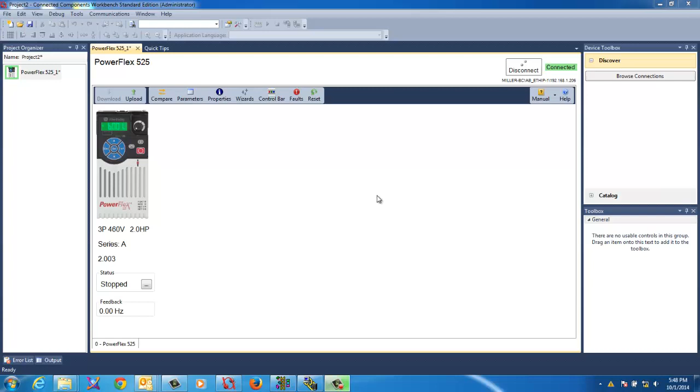Welcome to setting up the 525 to be controlled by a Micrologix processor. We're going to use a 1100 today. It's the same thing as a 1400 and so forth. Setting up your drive, I made a video on setting these up before, but I'm just going to do a quick run back here to show you how to set these up correctly.

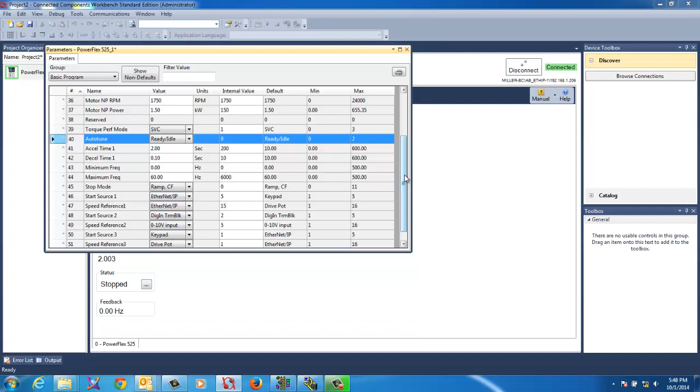So you'll enter in all your information in your motor, your acceleration, your decel, your min and max frequency, your stop mode, your start source, which we're going to do over Ethernet, your speed reference over Ethernet, and then you can set up the rest however you want to. Go to your properties, go to communications, and have your drive set up. Ours is at 206, so we'll be using 192.168.1.206.

So we can go ahead and get started. We're going to go ahead and make a brand new project. Open up your RSLogix 500. Select new. We're going to select the processor that I'm using. It's a 1763 and it is a Series B.

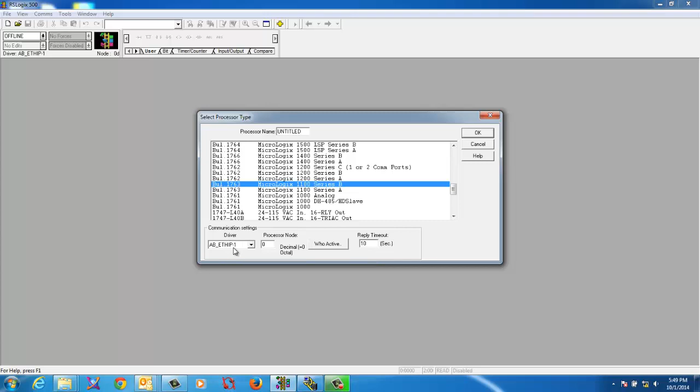Our driver is going to be over Ethernet. If you haven't set these up before, I can do a different video, but I already had this one set up with an IP address ready to go. So we're going to go ahead and use the Ethernet IP driver, and then we can go out and find it so I can download to it.

Alright, go to configuration. We're going to have to set up the processor for the right IP address. And since I already have it out on the network, we'll just run and look. We're using 200, so we'll go ahead and use that one. Sorry, wrong one. Go to channel 1. And we're not going to use BOOTP. We're going to go ahead and set it with its address. 192.168.1.200.

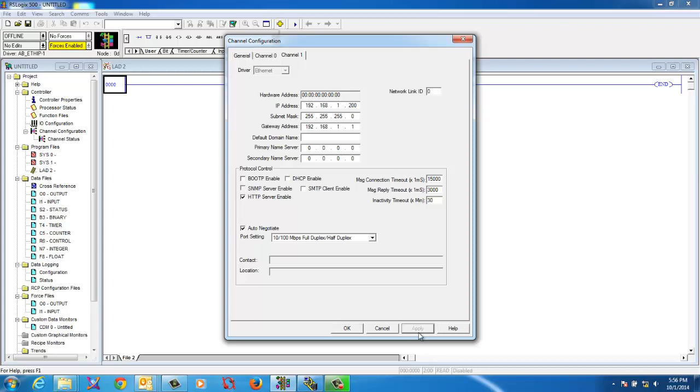Oops. Alright, I'm going to hit apply. Hit OK. Now you're going to want to set up your message files and your transfer files that we're going to need. So go ahead and we'll set up a message file. We'll have a few messages, so we'll just go ahead and give us 10 messages.

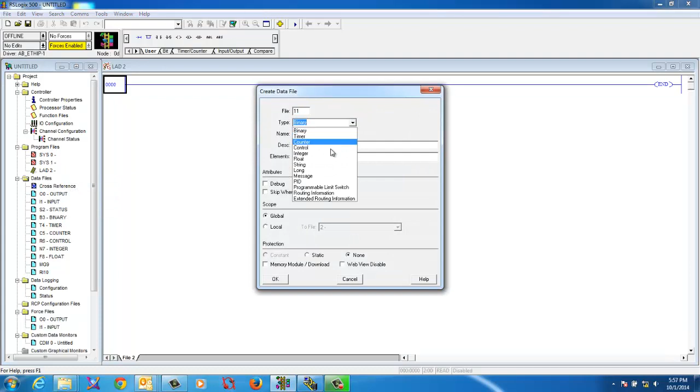We're also going to need the routing information file, so we're going to use a new one. Now we're not going to use the extended, we're just going to use the normal routing information. And we'll do the same thing there to match it up. Do a new integer file. We'll do 100. We don't need that many, but I'd rather have more than we need. I believe that's all we're going to need at the moment.

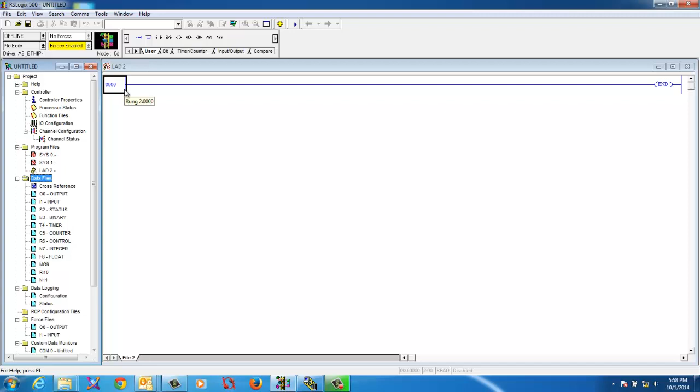So the first thing we're going to need is a timer to trigger the messages, and we're going to do a timer and message file, and then we'll add another file for controlling this drive. So we'll add a new rung in the right place.

A timer. That's one thing that we did forget to go in and set up. It only set you up with one. We want to go to properties. We're going to change that. And I add 40 just so that we have enough later if we ever need it. We use the first timer. And we're going to make this trigger quickly. You don't need to do it that fast, but it's just what we're going to do for this one.

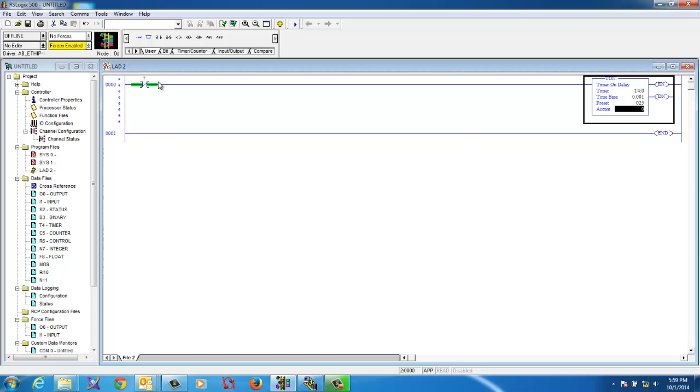Go back to our timer. That way when the timer is done, it can reset itself. There. Helps if I select the right thing. That should be good. Check it, everything's fine. Do our first message.

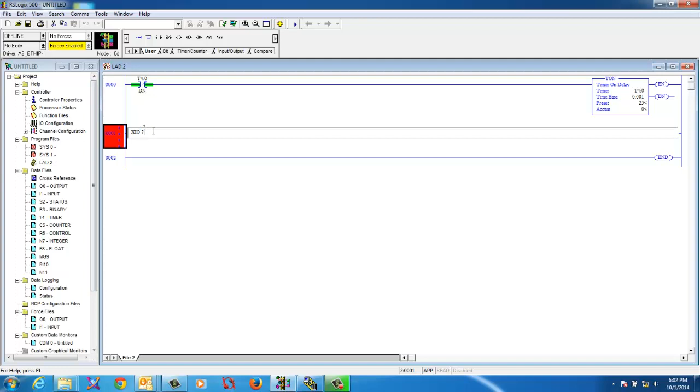Alright, the first thing we're going to have to do is open up a timeout value. The drive is defaulted to 0, and before we can send any control data, we need to have a non-zero value there. And so we'll go ahead and put in a new message. We'll use the first message out of our message file.

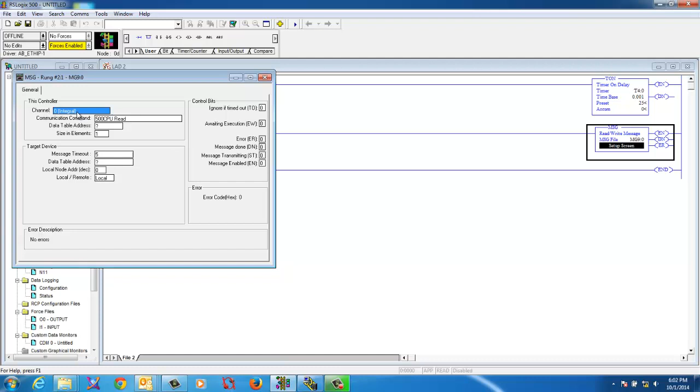And then we're going to go ahead and use the same done timer bit from our timer so that we trigger the message. And we're going to change the first thing in the message from channel 0 to channel 1. And this is going to change to a 500 write. And we're going to use the first integer value, which is going to be 11.0. So it'll be the first one. And we're going to put a 5 here because that's in seconds, so that's got a 5-second timeout value.

So we're going to write N11, and we're going to want to put it in to the drive table N42, or excuse me, 42.3. Now we need the routing information. So we're going to go to multi-hop. We're going to give the drive, if you remember when we set it up, it was 192.168.1.206.

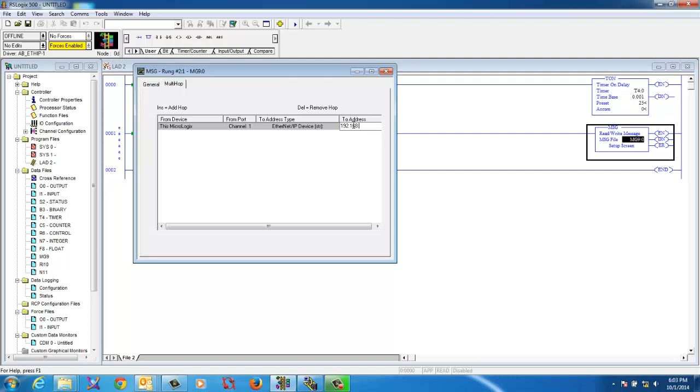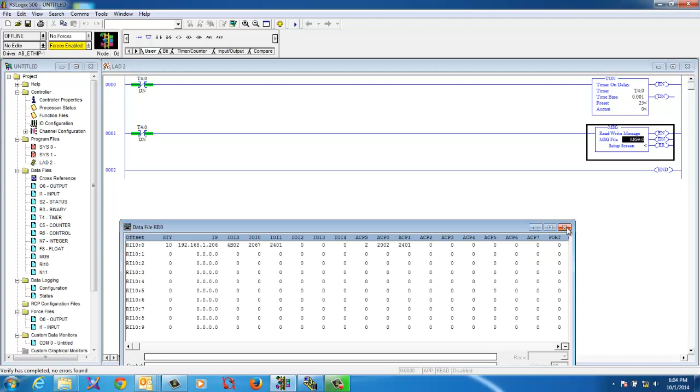Now we can set up the routing table. We'll use the first element, which will be RI10:0. Now this message is set up and it's ready to go. Once you close this and we compile it with no error, when you open up your routing information table, it populates all the routing information that it needs to connect to the drive. So that was the first thing we did.

The second thing, we need to add another message because we're going to want to tell this drive what to do. So basically we're going to do the same thing. I just copied the one from above. We'll change the message number to a 1 because that would be the next message in line. I'll open up and show you. Instead of dragging it, we just changed it. Open up the screen. Everything should be the same except for the file that we want to write.

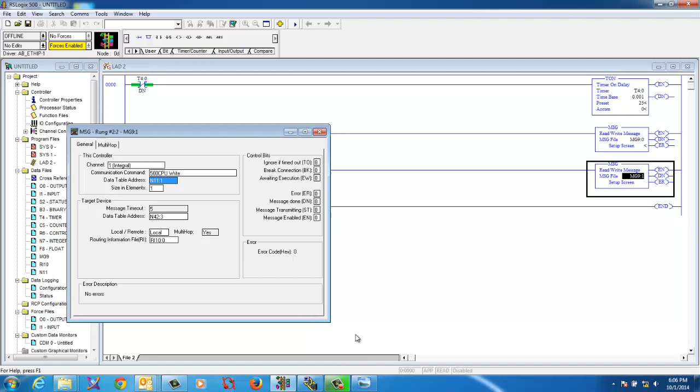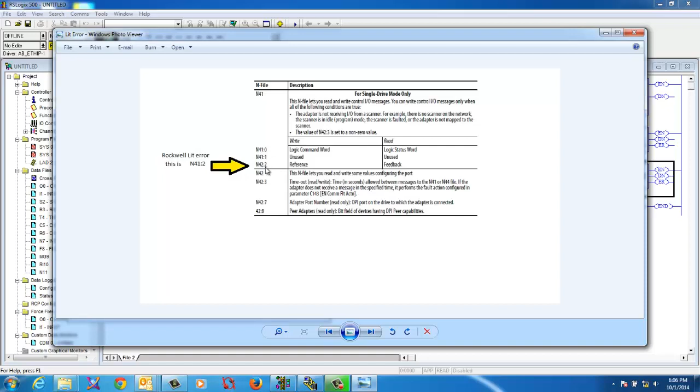So the next one that we're going to want to write, this is going to be our control values that we're going to write to the drive. It's going to be N11.1. And we're going to want to write those to... Now in the PDF that comes with the drive, or you download from Rockwell, it is going to show you that we're going to want to write the logic command word, and it's N41.0. Now later when we go to write the reference, Rockwell has an error, and this should have been 41.2. We'll get to that here in just a moment. So we're going to want to write to 41.0,

and we're going to want to change our routing information because we're going to want to use a new routing information file. Multi-hop still the same. I'm going to close this. I'm going to go ahead and verify it, compile it, and make sure our routing information is set up. Same thing. So anything that we write now into N11.1 is going to transfer to N41.0, and that is the logic command word.

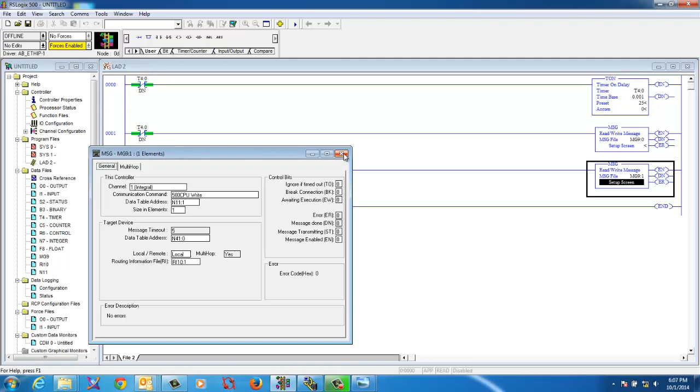Alright, we're gonna put in one more message. We'll probably put in 2 more, but for right now we're going to do 1 more. We're going to do another write, and what we're going to write is the speed reference. So we'll do the same thing. We'll just copy the rung above it. We'll paste it below it, and we're going to change the message to the next number, which is message 9-2. And we're going to go in. It's a write, and we're going to write this one from 11-2. We're going to change the, excuse me, not control word, the routing information, the next one in line.

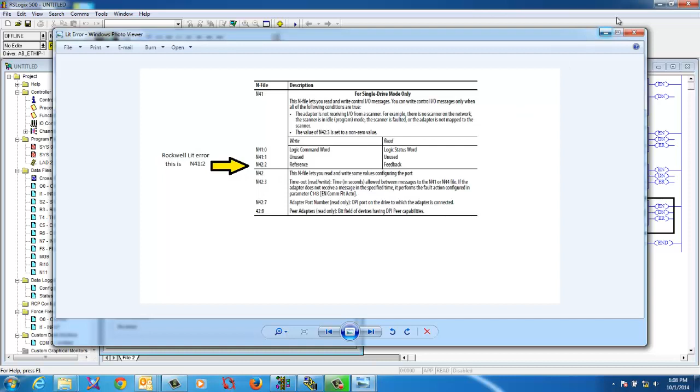And we're going to write this to, if you remember, we'll go back and look at our, we're going to want to write the reference. So we're going to want to write, like the PDF says 42.2, that is incorrect, it needs to be 41.2. So I've set 41.2. Make sure multi-hop, everything's the same there. We update the message, we're still doing a write, and we're using the same port. Make sure everything's fine. Compile. Go back, check the routing information, and it made it.

Now we're gonna do one read. We're gonna read the reference value so you'll be able to see the speed of the drive accelerate. So we're going to copy this, we're going to paste it. The only difference in this is going to be the fact that we're going to go in, we're going to change, of course, the message number, the routing information number, and we're going to change it to a read. And we're going to read it, and we're going to put the information into N11.3. That's all we're going to need for that.

Verify, make sure everything is good. No errors came up. And now we're going to add a new program file. I'm going to call it control.

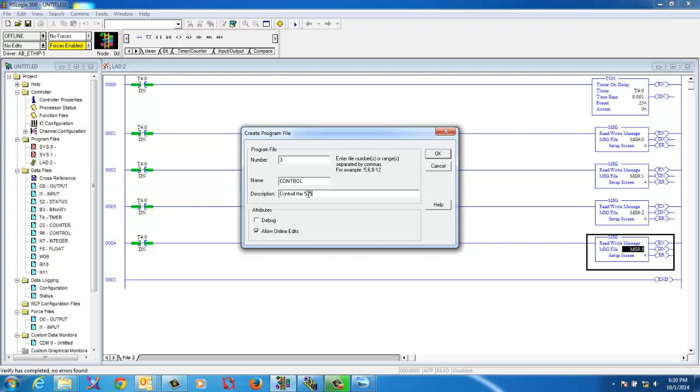We're going to control the 525. We want to put a JSR in, so we want to jump to that subroutine. And it is ladder 3. It's okay, so it's U3. Make sure that's okay. Everything's good. And then it starts over. Bing.

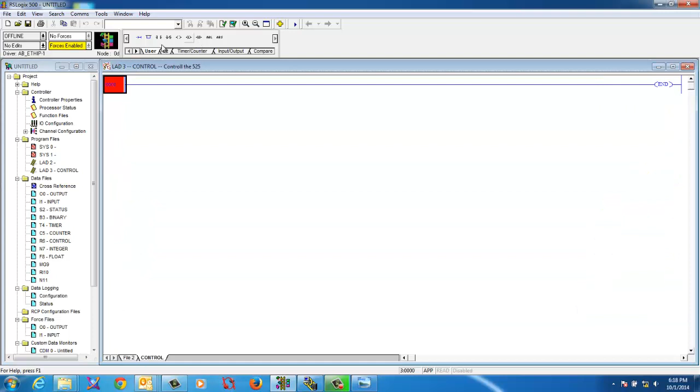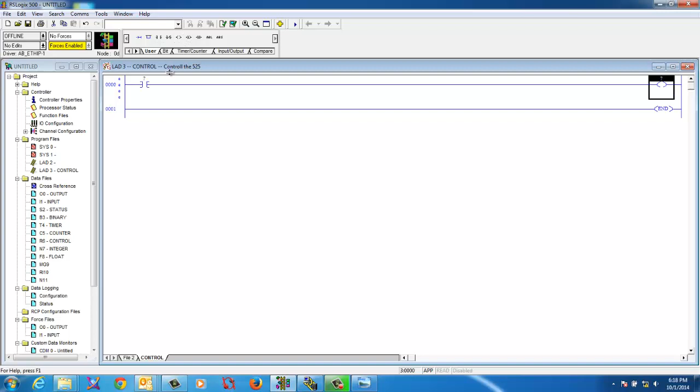Alright, we're going to go ahead and set up your control rungs. So we're going to want a stop and a start right out the door, and we're just going to do these simple. So add a rung. And I went through and I already preset up the binary. So all these, if you look down here in the description as you go through them, I already wrote those down based on the way we're going to write them out. And then you can add them on the other one. I'll show you how to write a description because we'll do the first one.

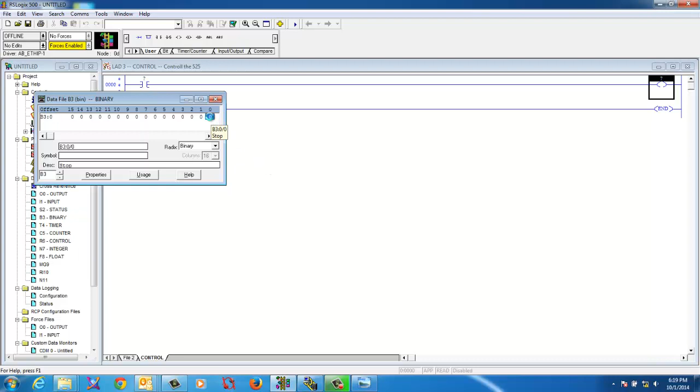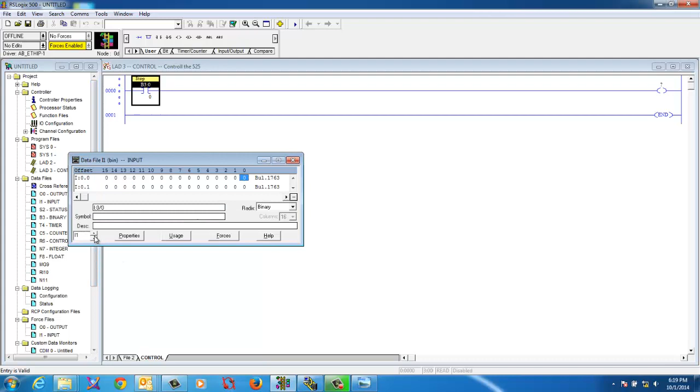So we're going to use the first one here, which is the stop. And then we're going to switch over to your integer file because we're going to write it to N11. Remember, what I mean by that is we're writing it to where we set it up in the message. So if I remember correctly, we're going to the control word, and we used N11.1. And we're just going to go verify.

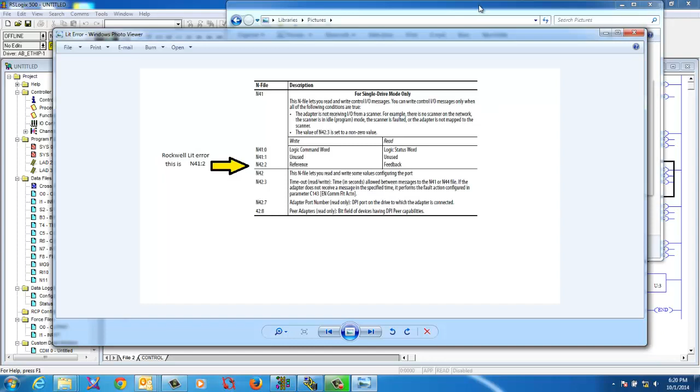And to do that, you just go back to your message routine, go to the second message, because that's when we set up for control, and it was. Because we're writing to N41, and if you remember in the PDF, it shows you that, right here, N41:0 is where we want to write it for the logic command word, and that is referenced off of the logic command word.

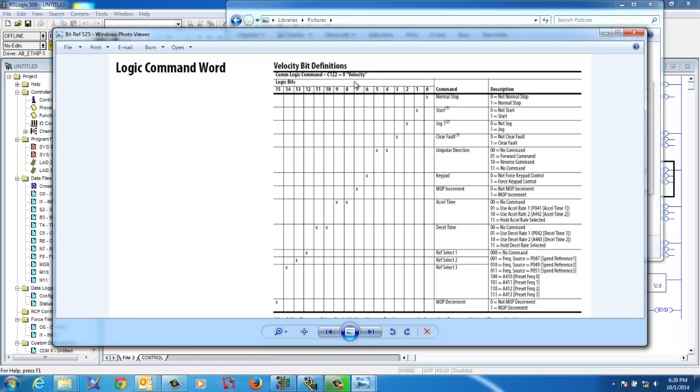And there's two of these, one for velocity and one for positioning. 90% of us will probably only use velocity, so we'll keep C122 at 0. Otherwise, you can go into your drive and change it to a 1, and that's for positioning. I'm going to minimize these so we can reference them here after a bit. But we're going to go back and we're going to write all our commands into N11.1.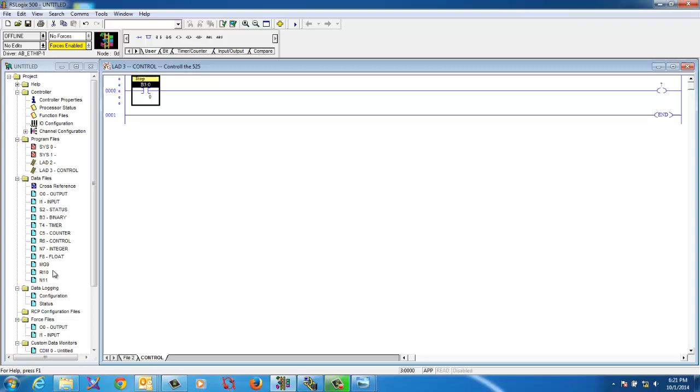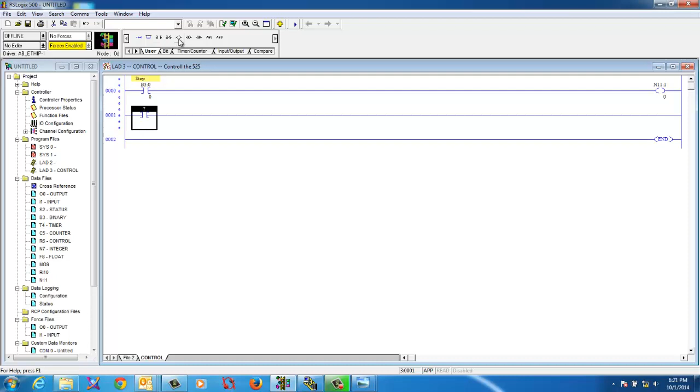So we'll open up N11, and then we're going to highlight N11:1, and then we're going to go over here and switch it to binary. So that gives you all your bits in that array. So the first one, 0, is stop. We'll add another rung, and we're going to want to put a start. So go back to N11. So the start's going to be here, and switch back over to binary, and the first one in there is the stop.

So in your integers, the one that you're going to write, if you want to label these, the description can be stop. So I just put a description in there. I usually write them as symbols. And as you go through each individual one, they'll change. But drag this up for our start drive.

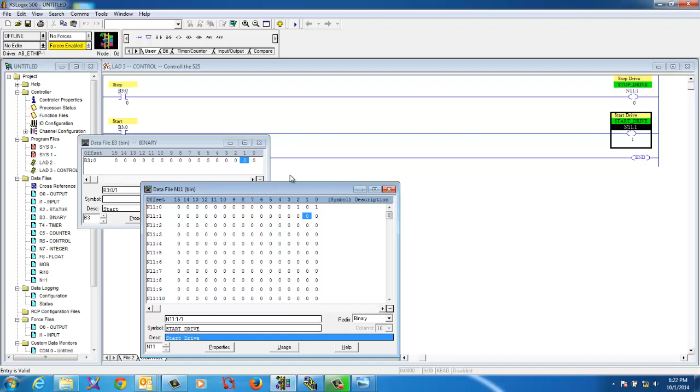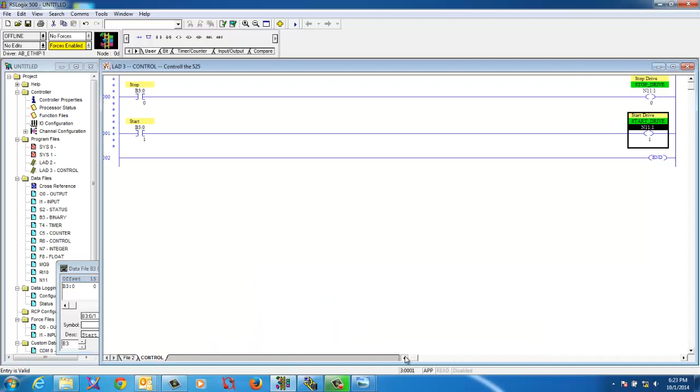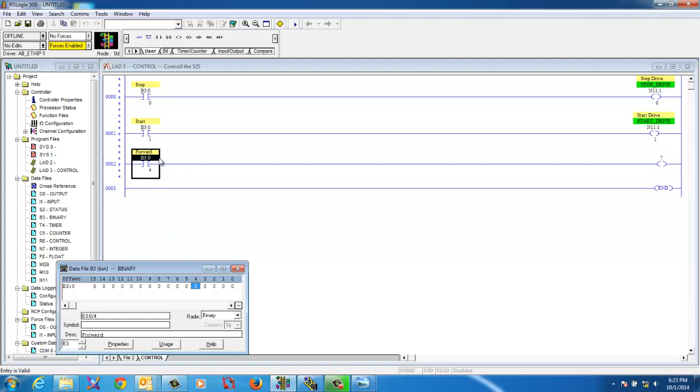We're also going to want to put in a direction that we want the drive to run. So back to the same principle. Select over. We got jog, clear faults, and a forward. We'll just use the forward position. So that was 4. So when we bring up your integer file, we're going to want to use 4. Of course, you can label it too. I probably won't do all these, but I'll just do a few, just so we know when we're looking at it what we have.

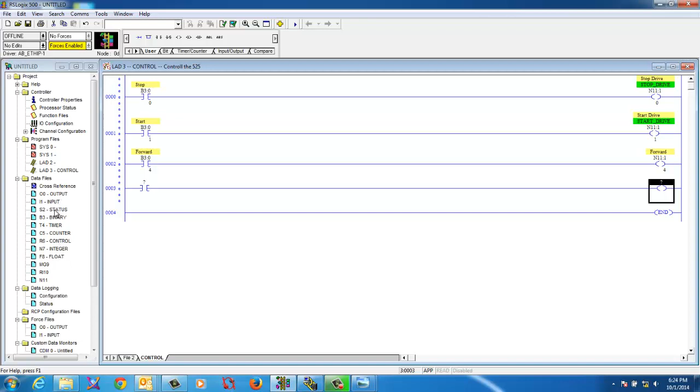And we're going to want to put in one more, just in case we fault the drive. We want to be able to clear the fault. So we're going to add the clear faults in. Bring up our, we'll back up one, that was 3. And so we'll pull up the integer file and we'll use the corresponding one, which would have been 3. Oops.

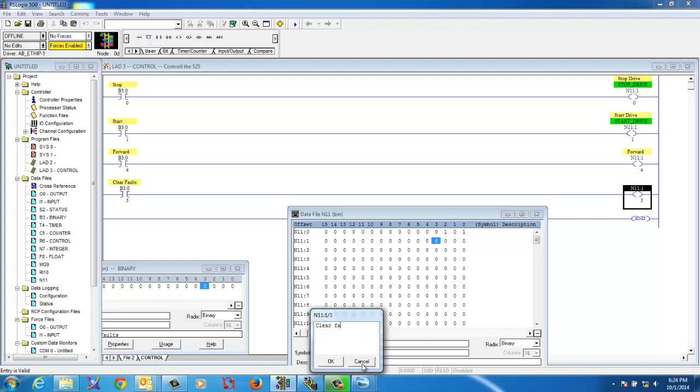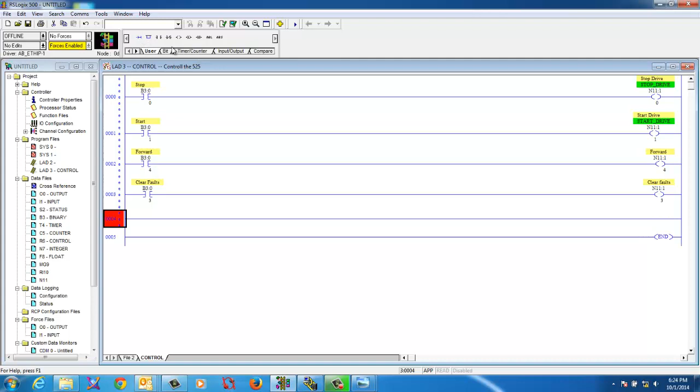Alright. One more that we're going to put in a move, because we want to control the speed, and we're going to use a speed reference to do that. So we'll add one more rung. We're going to put in a move instruction. Pull up our integer file. So we used this one right here.

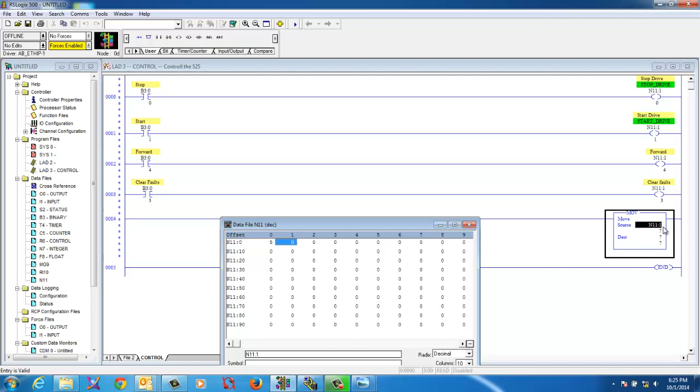And it's not going to let me do that. So, decimal. I'll drag this. There we go. Well, let's move it down one, and we're going to change this to 10. So that's the one we're going to write it into, and they'll transfer it to here, and then the message will send it to the drive. We'll check everything we just did. Everything came out a-okay. Compile it, and we should be good.

We're going to add one more right here below it, because we got the reference speed back from the drive, and we want to see it actually ramp and accel and do the things that we say it's doing. So we use another move instruction so we can see it on the screen. Alright, well, we made a mistake right here. It's supposed to be 2.

Because that's going to write the speed. The next one is here, and it's going to be a 3. And we'll just write it to an 11. 11. And that should be everything you're going to need for this to work correctly.

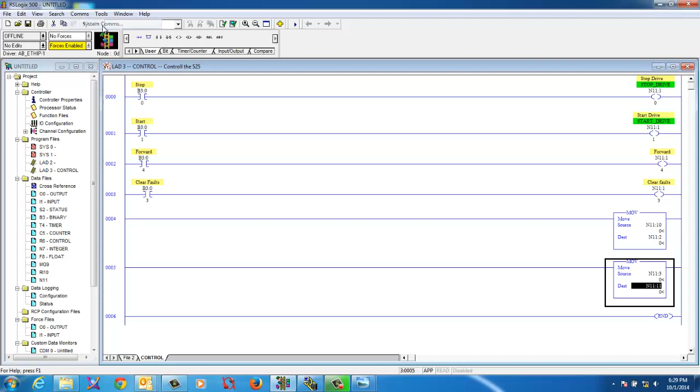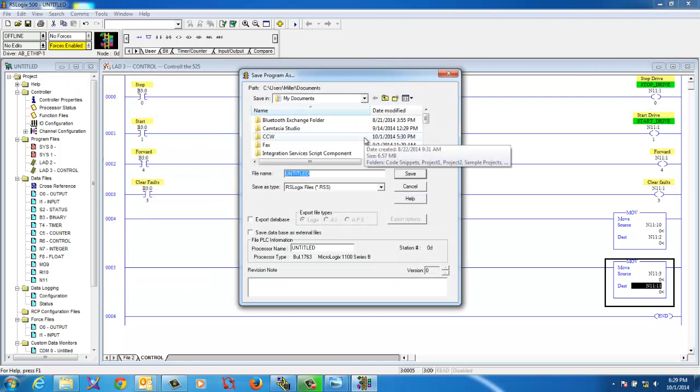We're going to go ahead and download this to the processor. System comms, and it was 200, and we're going to do a download. Maybe. Oh, I didn't save it. Alright, we're going to say this is a PowerFlex 525. And yes, we want to proceed with the download. Yep.

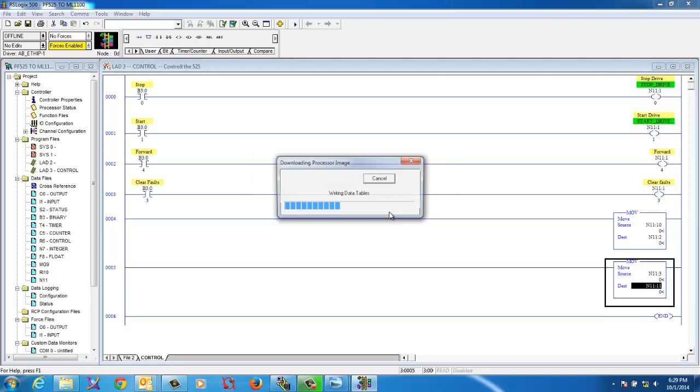Yes. Going online. Yes. Let's go back over and make sure that all our messages are updating. And that's back in file 2. And it doesn't look like we have any errors. Seems like everything's working the way it should there. This is not the most practical way to do messaging timers. Just putting that out there.

So let's go to the drive. The drive probably has a fault on it. No fault on the drive? Nope, no fault. Alright. So we'll go back over to the control ladder. We're going to want to give it a speed. So let's say we're going to run it at 3115 for hertz. So it's going to know it's going to run at 31.15 hertz.

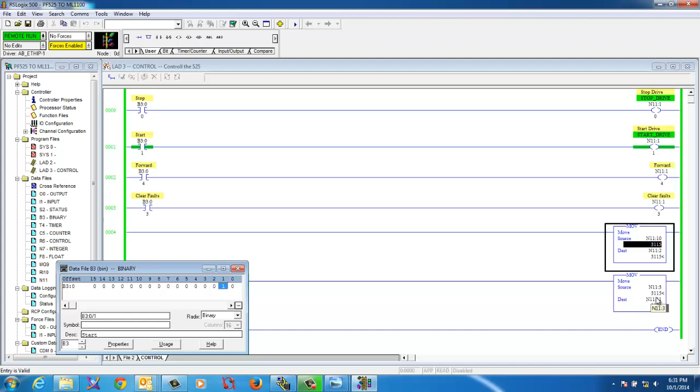We'll bring up this table here, and we will put a 1 in the start to start the drive. And as you see on the screen right here, you watch the drive ramp up to 31.15. We'll change it on the fly right here. We'll change it to 55.16. And you see it ramp the speed of the drive up. Let's drop it down to 10.12 hertz. You see it does there.

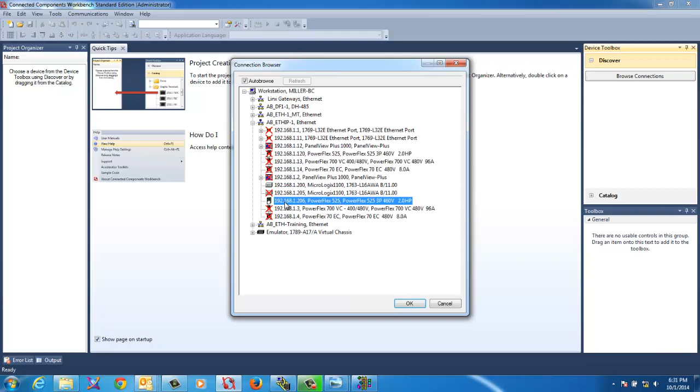Let's go ahead and open up our Connected Components Workbench, and I'll show you so you can see it on here as well. And it's at reference, and we're running 10.12 hertz. Minimize that a little bit. I don't know if I can get this quite nice enough on both spots to possibly do. Let's scroll this over some.

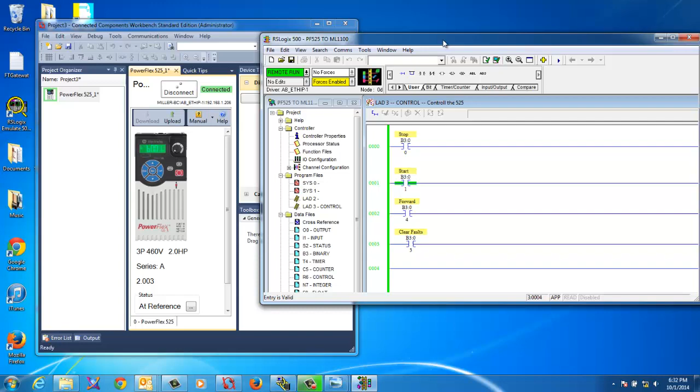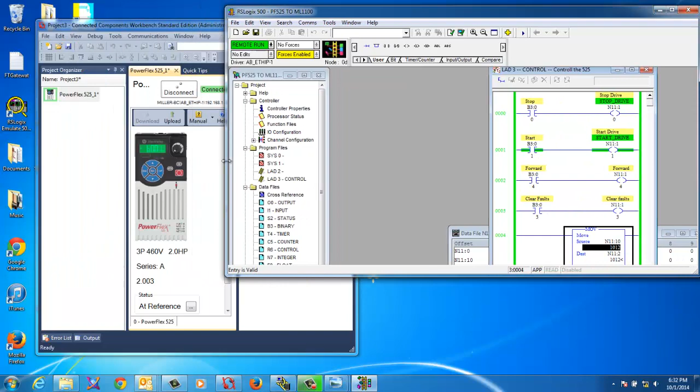Only try to put it above it here. Here, excuse me. I can do this. I forgot. It's been a while since I've done anything with RSLogix 500. Okay, scroll this one down a little bit.

Stop the drive. I'm going to remove the 1. Of course, the drive's still running because you didn't enter a stop command. Now we're going to stop the drive. Drive decelerated down and stopped. So, as you can see on the left, it stopped.

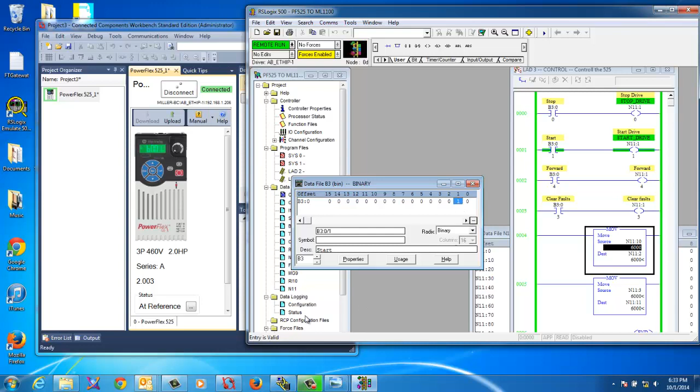We're going to start it again, but we're going to run it up to a full 60 hertz. So let's change that to 6,000 and go back here. Let me put a 1 in start, and you can watch it accelerating. Now it's at where you wanted it to be. Pull that down just a hair more. There. Stop. Again, to stop.

And I'll show you what clearing the faults does. Let's pop that Ethernet cord out. We'll just give it an Ethernet fault. It didn't fault, did it? There we go. Yeah. So you can tell we unplugged the Ethernet cord, and now it's going to try to reconnect to it.

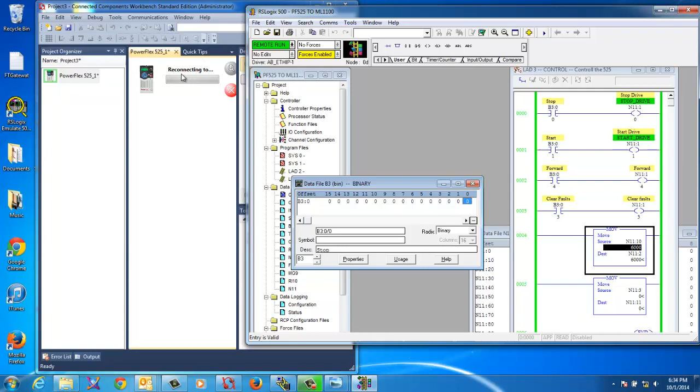It'll take just a second. There we go. Now we're faulted. Now I'll show you over here by clearing the faults. Go to B3, put a 1, clear. Clear the fault, clear on the drive, stop command, and then start command. Accelerate up to 60 hertz. Yeah, that's all it is. That's all there is to it.

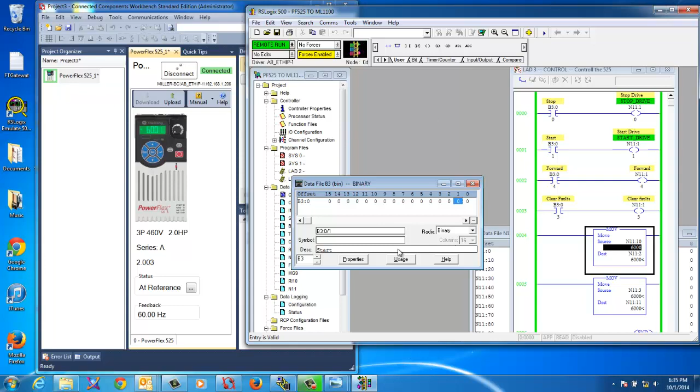There is for reading the status of the drive. Just do the same thing we did for reading the reference speed. You just put in the 41. Which one was it? Let's go back and look real quick. Let me fix this. Range default. Okay. Back to file. What we did for writing.

We wrote to N41, and you'll want to just throw one in to read from it, and then you can go through and do the same thing for picking out the bits, and that'd be, is the drive ready to run? Yes, no. Is the drive active? What is commanded direction? It'd be a 0 for reverse, 1 for forward. Actual direction tells you which way it's actually rotating. Is the drive accelerating? You can have feedback for accelerating.

For decelerating, a fault, at speed, main frequency, not controlled by active communication, or it is being controlled by your active comm. Operation command, is it being manually done, or is it being controlled by your active communication? And then your digital inputs back to the drive. And those are things that you can get back from it under velocity. The other one would be the position feedback, accelerating, reverse, travel position, not faulted, etc.

It'll have the rest. At the end of this, I will put up a few pictures to show you what those are out of the PDF manual. Also, in the comment section, I will leave the way to get to the PDF that has it all on it, and they're on page 136.

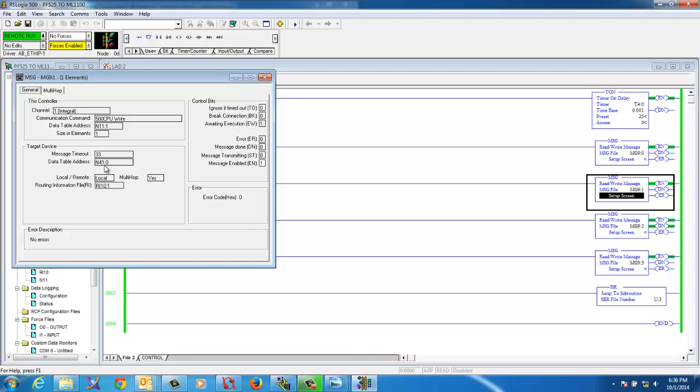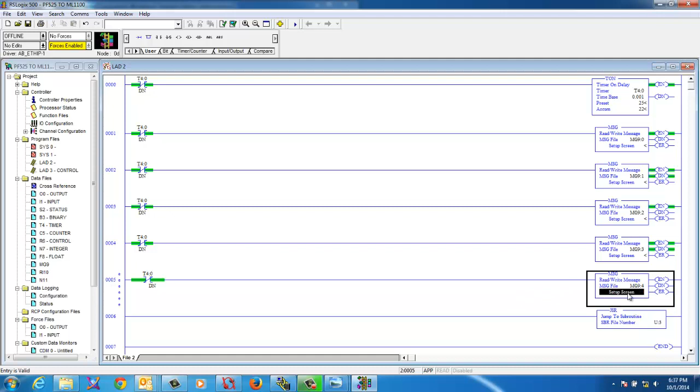But I'm gonna go ahead and go offline, because we can't add a message online with this one. So we'll go ahead and we're going to do one more message. I'm going to copy. The message 4. We'll change this to a 4. We'll change this to 0. And change this to 4. Multi-hop's the same. Everything's good. Check. Check. We'll do a download.

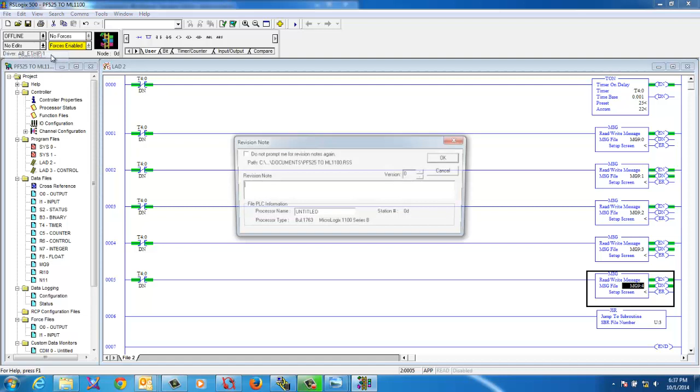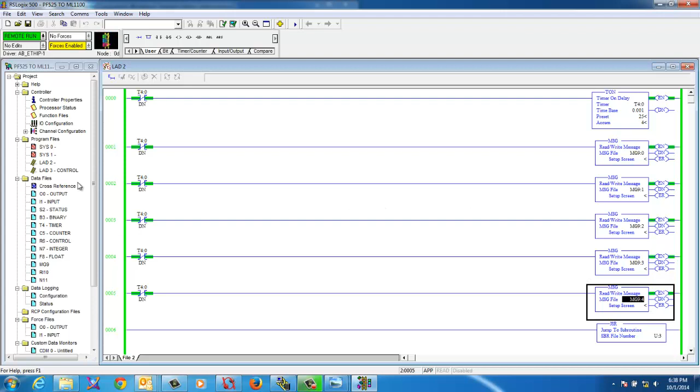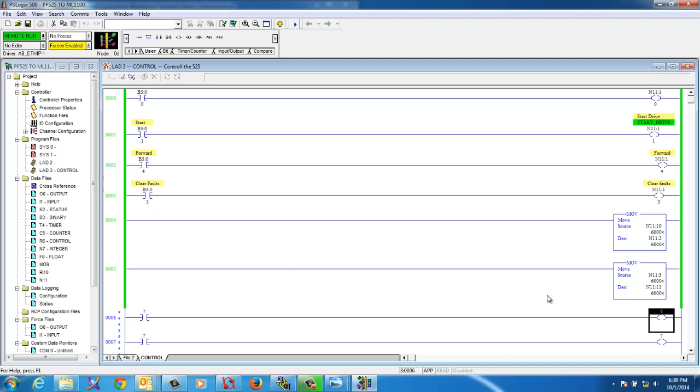This might actually throw the drive into a fault, because it lost communication with the drive. Nope, it didn't. That's all right though. Now that we have a message coming back reading, we'll go back to control. Let's add a few below. We'll just put in 2 rungs. And all we're going to do is have some feedback. We'll use integer file. These are all full because I only added 1. That's fine. So we'll just use 90.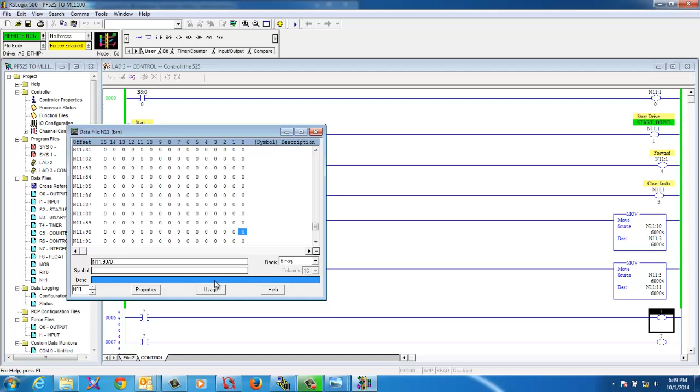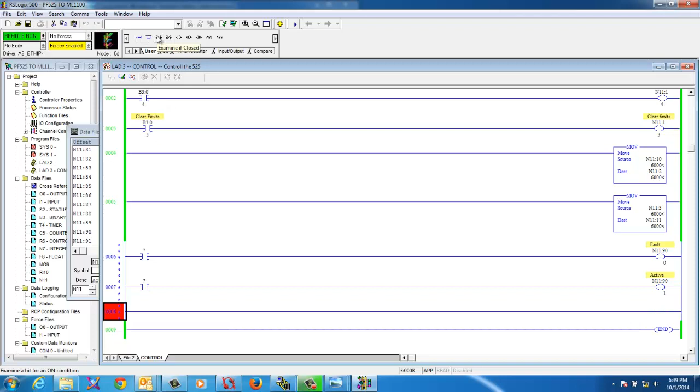And we'll use the first one. We'll look at it in binary. And we'll label this fault. So the first one will be, is it faulted? And the second one we will set up to, ooh, I didn't do that right. No, we did. Never mind, because we're writing this. Active. And then I'll just add one more to show you accelerating. And we sent those, of course, to the same file. And we did it in 4.

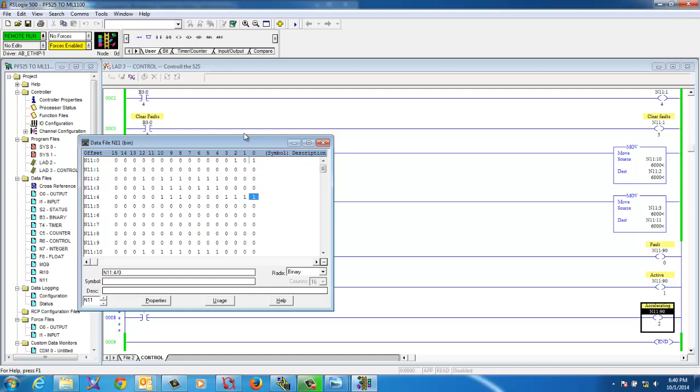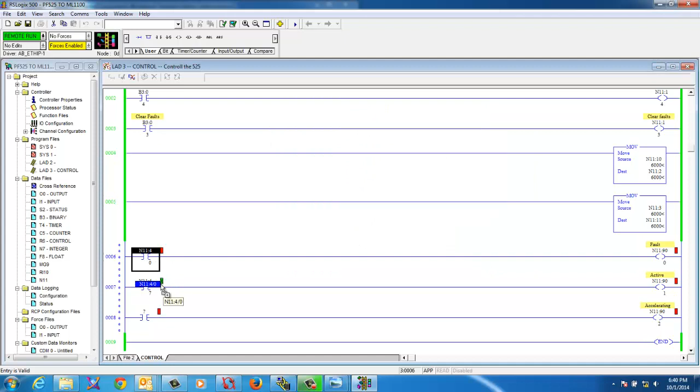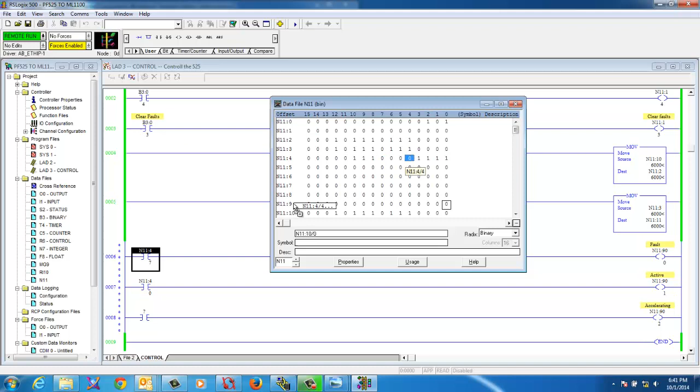So, is the drive active? Oops. Faulted is 7. Oh, we did that backwards, didn't we? And then we want accelerating. And that would be 4. Make sure it's good. Looks fine. Accept. Let's accept. Compile. I'll do that for all 3. Check. Check. Compile.

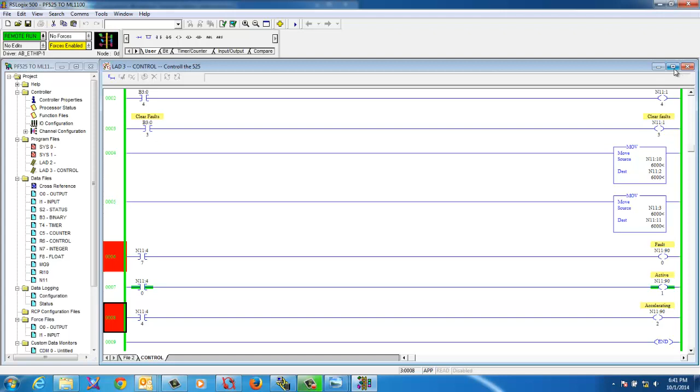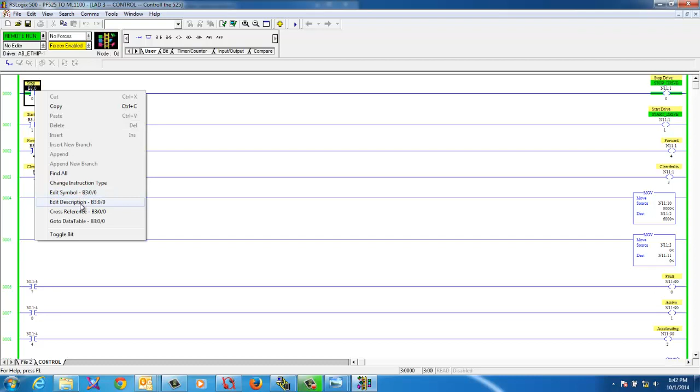Okay. Right now we know that the drive is active. The drive is running. We're going to stop the drive. Let's minimize this just a little bit so I can get up towards the top. Alright, we're going to stop the drive. Let's toggle it. Drive is no longer active. As you can see, it went out. Turn that one off. We got 2-second accelerate, so when I start this you should see accelerating and active. And that's it.

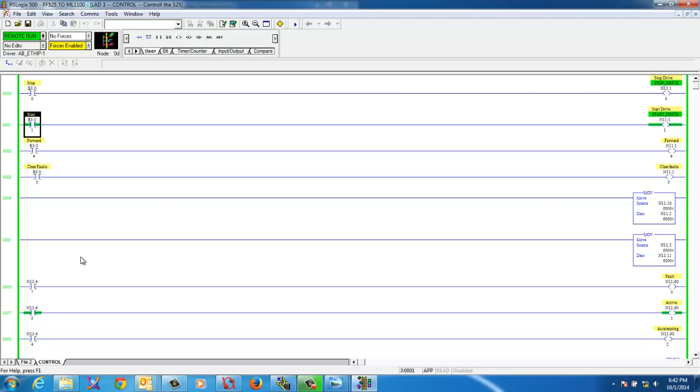That's all there is to setting it up with the Micrologix 1100.